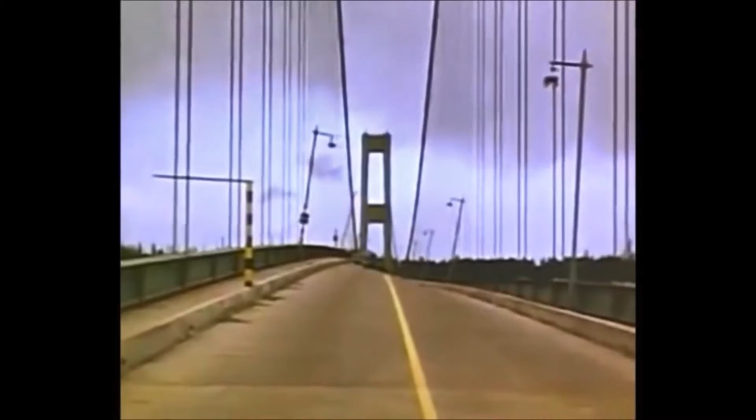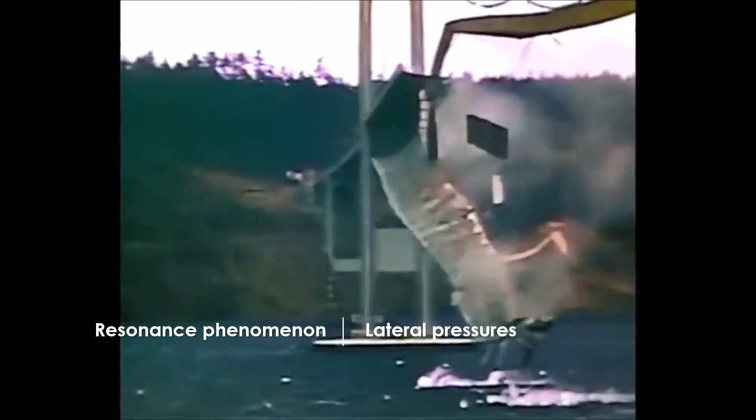Our bridge is shaking absurdly. The reason why the bridge swings in the wind, even enough that a man can walk on it, is due to its natural frequency. Any building has a natural frequency. The vibration that reaches the natural frequency by the resonant phenomenon causes the building to shake even more. When the building cannot withstand the lateral pressure, it finally collapses.

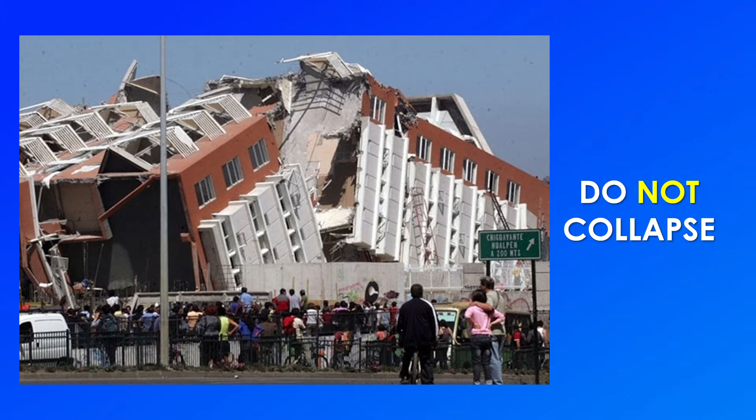High-rise buildings are prepared for wind and earthquakes so that the building does not collapse. The reason for a skyscraper's collapse from these factors is essentially the same: it's because of the vibrations I've mentioned earlier.

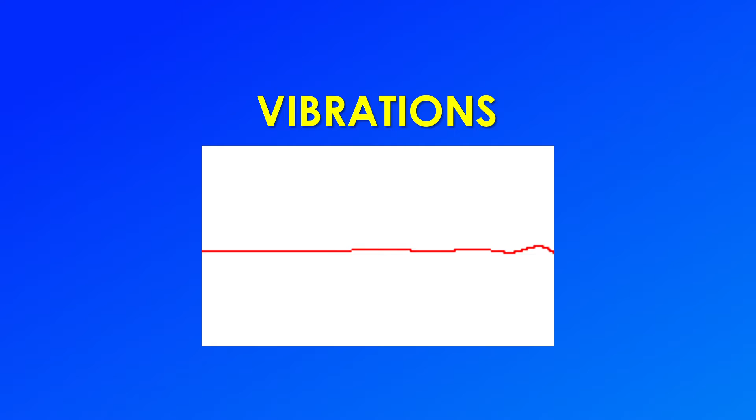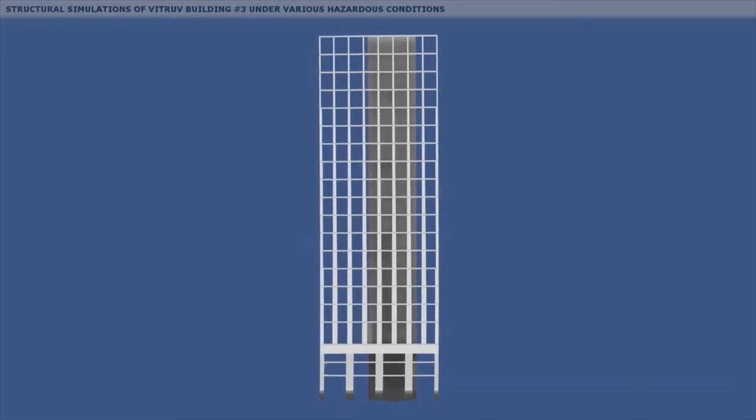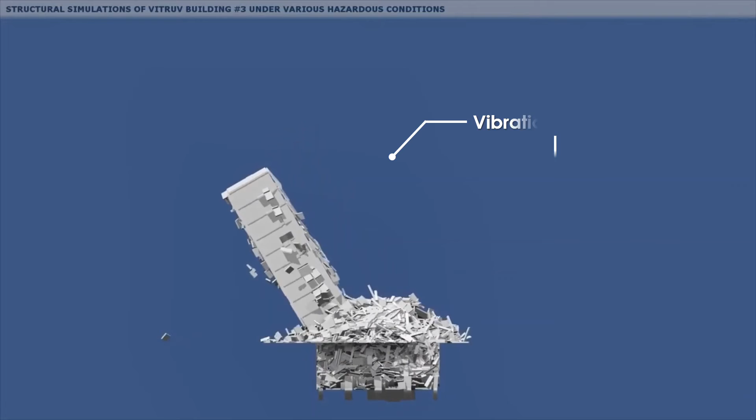Earthquake causes vibration in the ground beneath buildings. As shown in the video, when an earthquake occurs, the building vibrates. I'll show you the process of collapse in detail. The building initially holds out with inertia, then moves the same as the vibration frequency increases, and the walls or pillars of the building cannot withstand the lateral pressure caused by vibration, so they collapse.

However, the fact that a building is shaken by the vibration is not in itself evidence that it is not earthquake safe. Rather, a well-shakeable building is a safer structure that withstands earthquakes better.

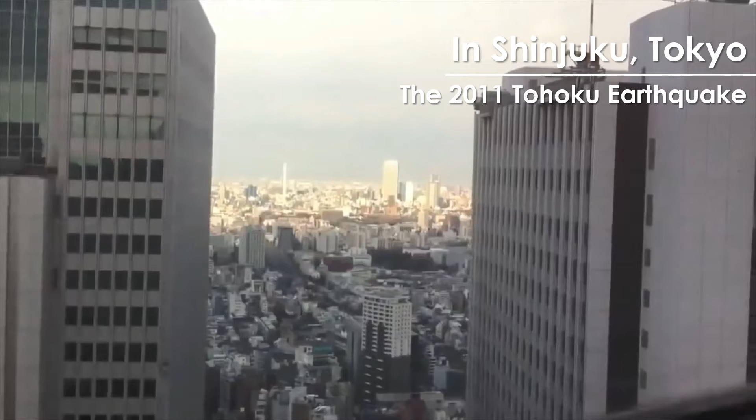This video shows a skyscraper in Shinjuku, Tokyo, where vibration was transmitted during the 2011 Tohoku earthquake. As you can see, the buildings shake side to side as if they are dancing. This is not a poorly built building, but rather a well-designed seismic building.

The building is designed to shake flexibly and naturally according to the vibration. When it comes to how much a building is prepared for an earthquake, it's not a matter of strength, but a matter of flexibility.

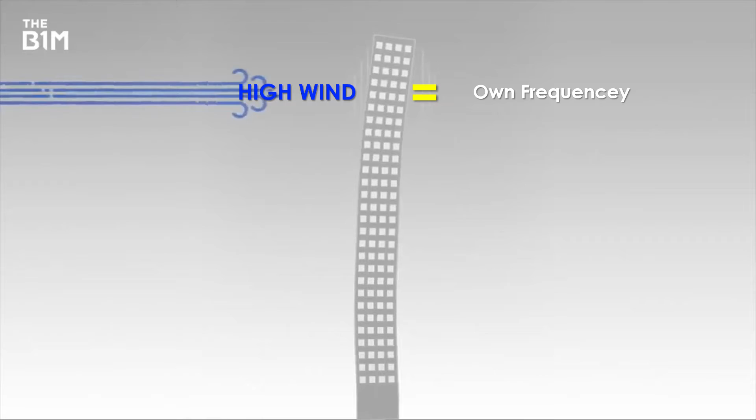The same goes for the wind. Each skyscraper has its own frequency. While any such movement may initially be minimal, high winds can create vortices that can match the frequency of the building they are moving around, causing noticeable swaying and shaking motions for those inside.

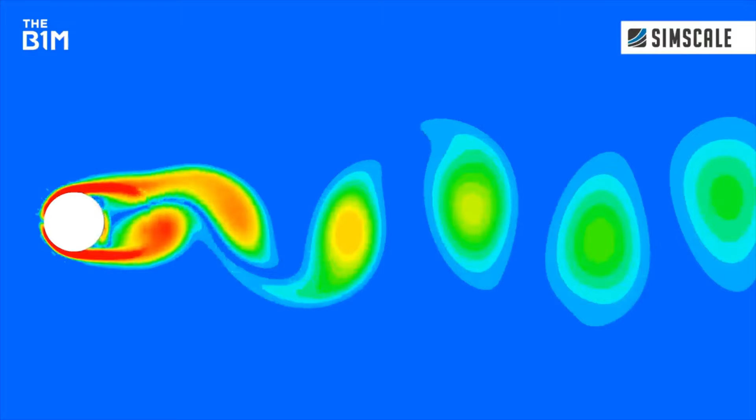Most buildings withstand irregular wind vibrations. The problem is that the vortex is a regular wind. As wind moved around the top of those tall structures, vortices were being created in a process known as vortex shedding.

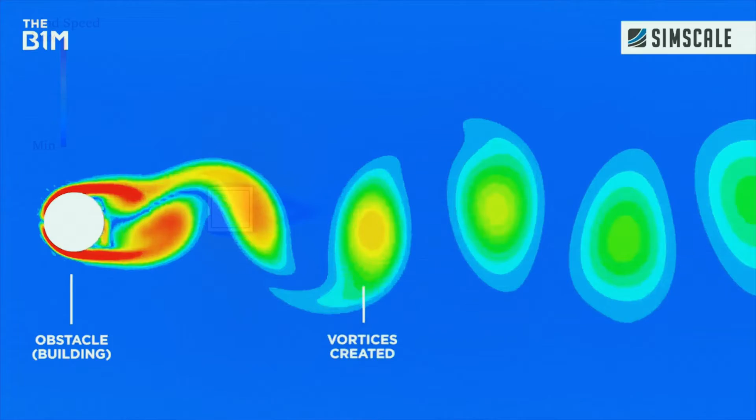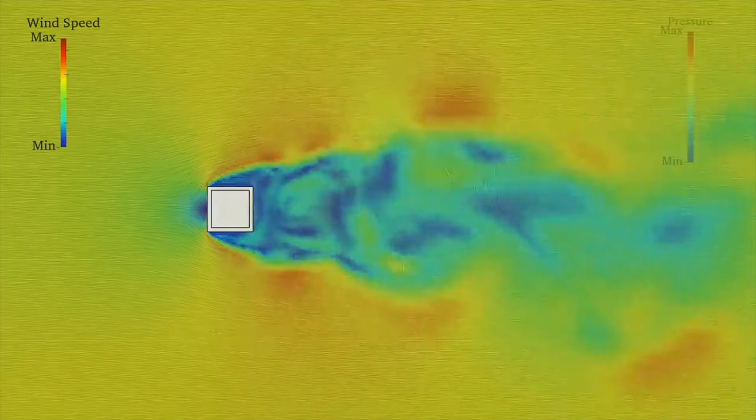This process, much like water flowing downstream, acts differently on obstacles depending on how streamlined they are. In the case of these buildings, the sheer block walls created a bluff obstacle that wind had to flow around. As strong winds moved around these structures, areas of low pressure emerged on the opposite side of them, creating suction forces that pulled at the buildings, causing them to sway back and forth.

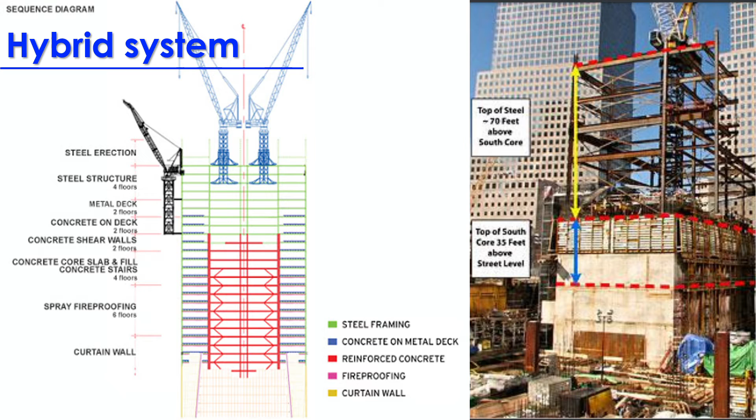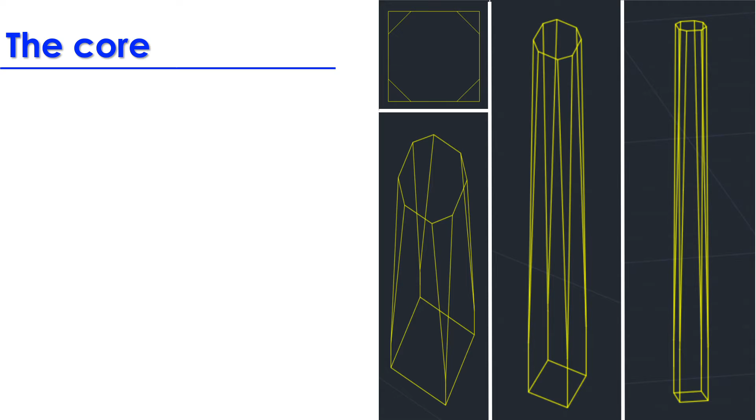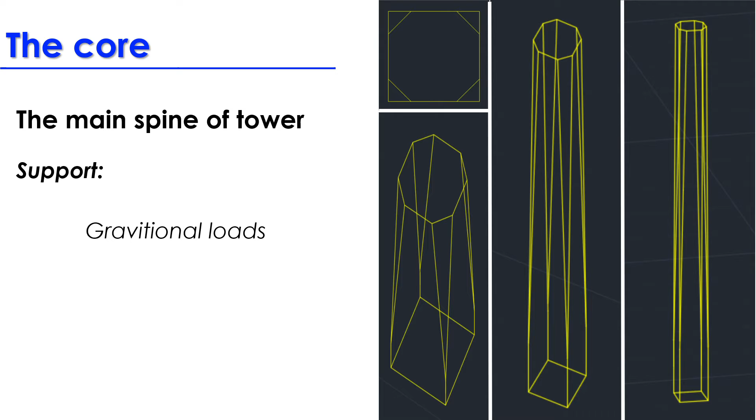The tower structure is composed of a hybrid system combining a robust concrete core with a perimeter ductile steel moment frame. The reinforced concrete core wall system at the center of the tower acts as the main spine of the tower, providing support for gravitational loads as well as resistance to wind and seismic forces.

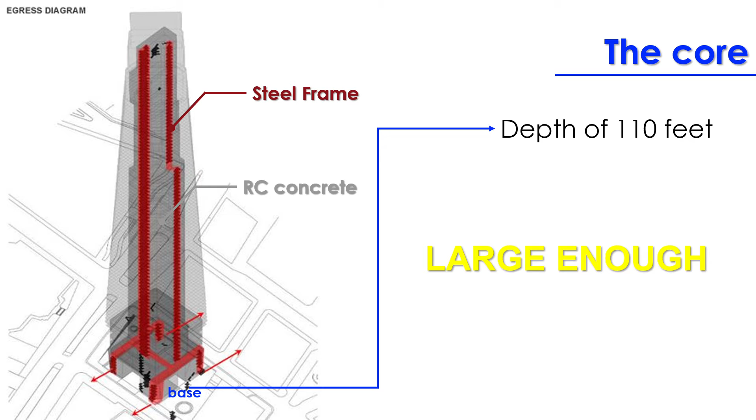The core is approximately square in footprint, with a depth of about 110 feet at the base, large enough to be its own building. It houses mechanical rooms and all means of egress. The core structure is compartmentalized with additional interior shear walls in orthogonal directions.

The concrete strength ranges from 8,000 psi to 14,000 psi from the base to the top. As for crumbling, the towers are held up by a steel framework that is elastic enough to take the bending without damage, giving the building enough flexibility for safe vibration along the frequency of the earthquake.

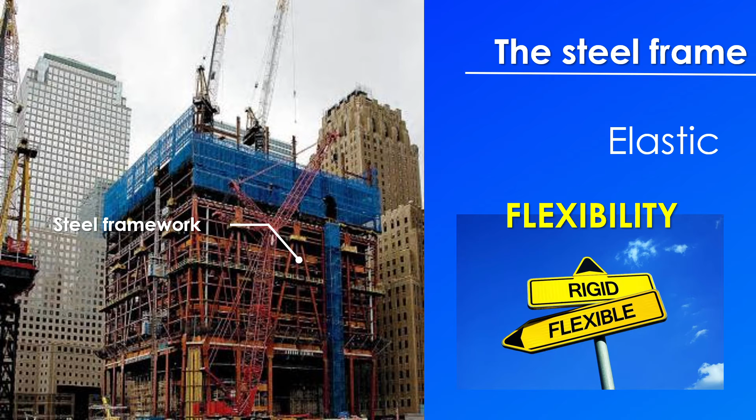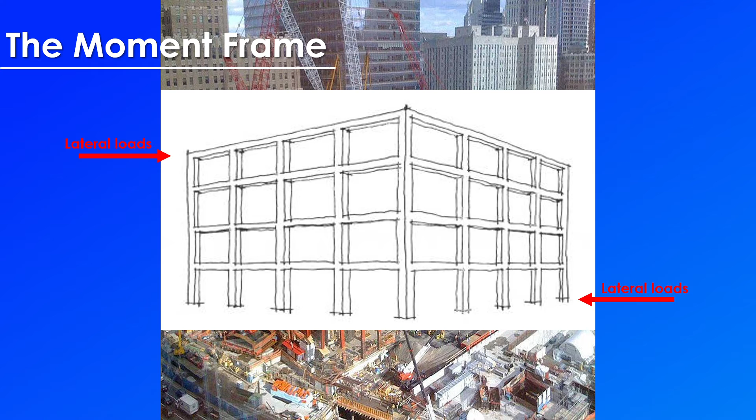A ductile perimeter moment frame system is introduced for redundancy and to further enhance overall building performance under lateral load. The perimeter moment frame wraps around all vertical and sloped perimeters, forming a tube system.

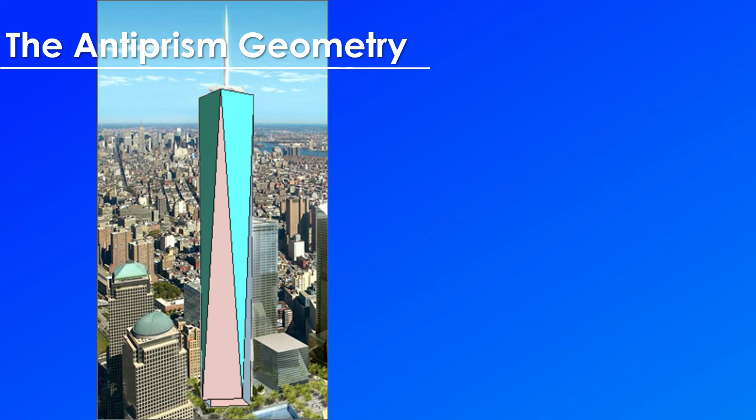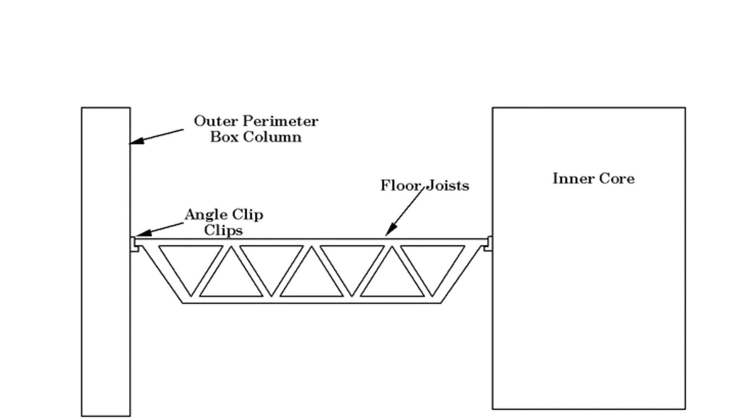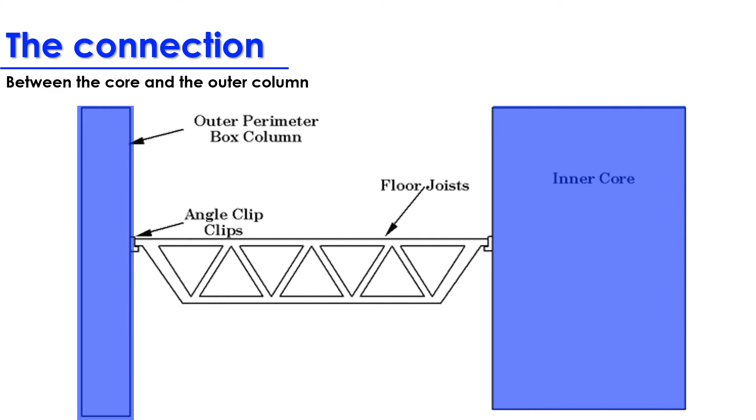Along the height of the tower, the anti-prism geometry creates unique structural conditions which necessitated the design and fabrication of special nodal elements using relatively large plating with significant capacity for load transfer. For further enhancement of the lateral load resisting system, the concrete core at the upper mechanical levels is connected to the perimeter columns via a series of multi-level outrigger trusses in both orthogonal directions.

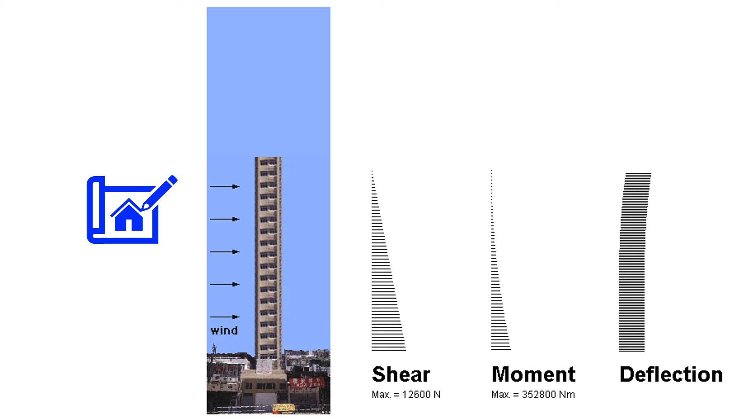During the design of a building, special care is to be taken when considering the wind load. Buildings taller than 10 stories would, for the most part, require extra steel for sidelong framework. Also, the One World Trade Center's height and its slenderness imposed stringent demands on the overall strength and stiffness of the structure.

The structure has been designed for wind load requirements of IBC 2003, with due consideration of the NYC local wind climate conditions. In order to meet those demands in an economical way, high strength concrete was utilized, and it composes the core of the tower.

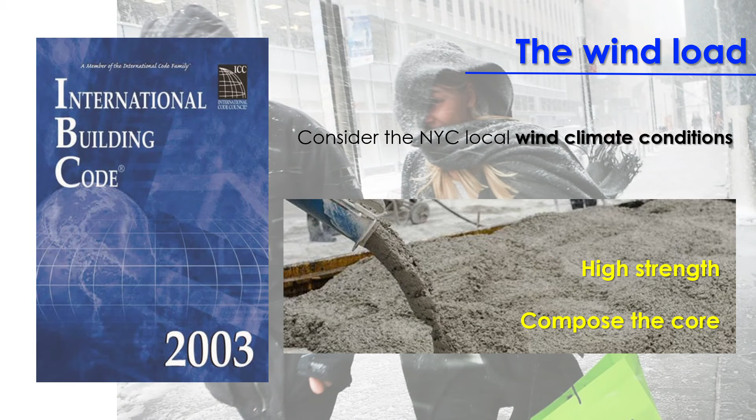In addition, a series of wind tunnel tests were performed to ascertain a more accurate measurement of wind loading and wind responses of the tower with respect to hurricane wind load effects and human comfort criteria.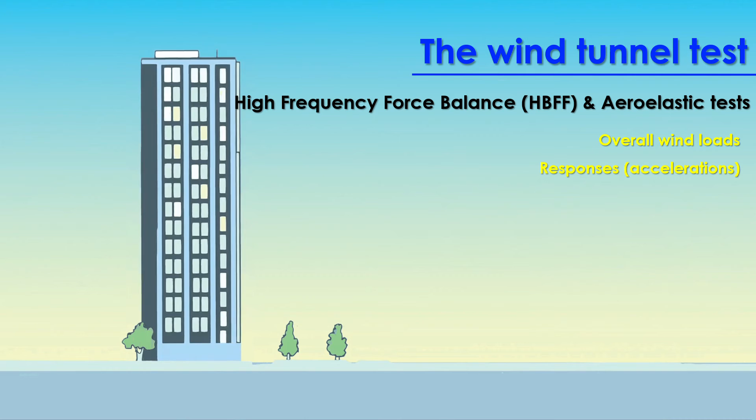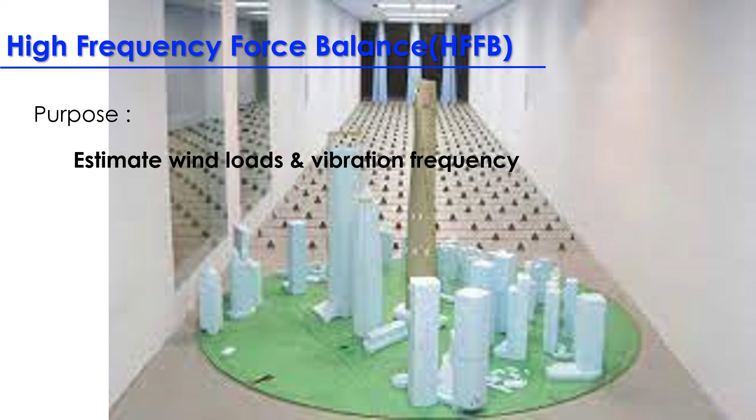High-frequency force balance test is used to estimate wind loads and vibration frequency of the building to be utilized in structural design, and to measure vibration acceleration of the building to evaluate serviceability.

In the HFFB test, a light and rigid model is used to measure wind loads by 6 components. The wind force coefficient is computed by time-dependent force data, and response of the model is evaluated by spectral modal analysis.

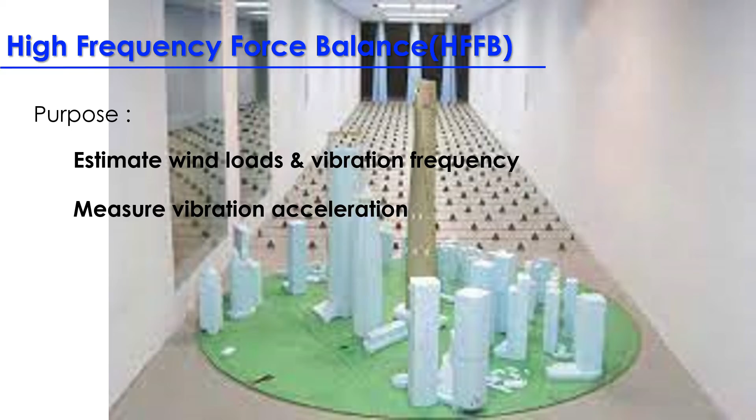Aeroelastic model test is suitable for slender, flexible, and dynamically sensitive structures like One World Trade Center. The objective of the aeroelastic model test is to investigate the vortex-induced vibration and aerodynamic instability vibration within range of target wind speed.

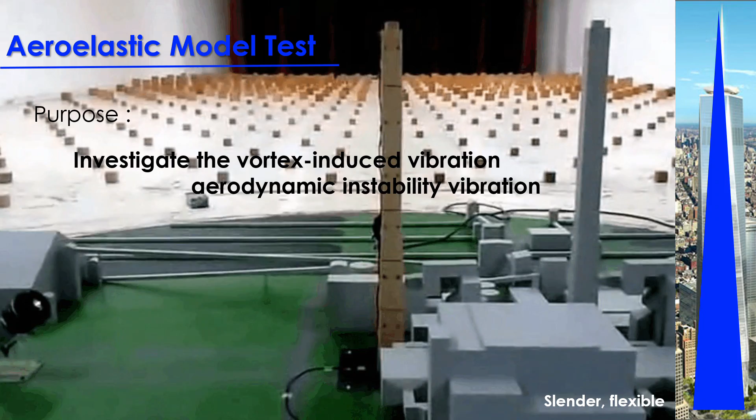The aeroelastic model is designed with precisely scaled dynamic properties of the full-scale building, which includes stiffness, mass, natural frequency, and damping properties of the structural system. Responses are directly measured in the wind tunnel using non-contact displacement meters or accelerometers.

Next time, we're going to study the overall structure and frame of the building, and the facade. That's it for our today's presentation. Thank you for listening.